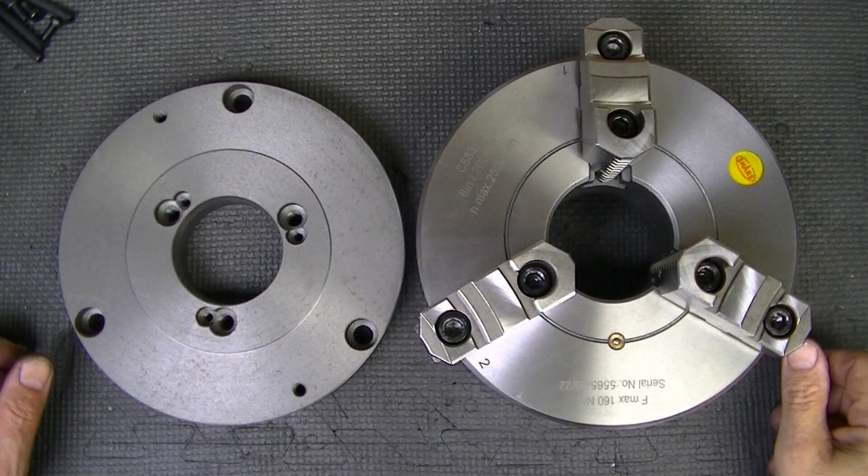Today we are going to take an 8-inch or 200 millimeter standard 3-jaw non-adjustable chuck and a standard D1-4 blank mounting plate for mounting the chuck, and we are going to make it adjustable like a Buck chuck or a Set-Tru chuck, but we're going to address the shortcomings of the standard design of those chucks as far as adjustability. I'm trying something a little different here, and we'll show the reasons why and all the design choices that went along with it. So let's get to it.

Keep your interest, I'm going to show you this chuck completed and operational. You'll notice the marker is for which adjuster we're working with: 1, 2, 3, 4, and you'll notice they're all sitting on 0, which is with the chuck running true. So this TIR here is within a half thousandth.

Now I'm going to move over to this turned diameter here where it is running out. This is my TIR at my number 2 and number 4 locations, which are 180 degrees apart. That's a full 6 thousandths TIR, which means we need to move the chuck 3 thousandths of an inch. So I go to my low side and back off 3 thousandths. I come to my high side, number 4, and tighten it to 3 thousandths.

Now I come over to the indicator and do my 2 and 4 locations. You'll notice they're darn close to 0. Now we're going to look at the opposite direction, which looks like 1.5 there, roughly 1.5, maybe 1.25. Adjust this so that we're balanced out.

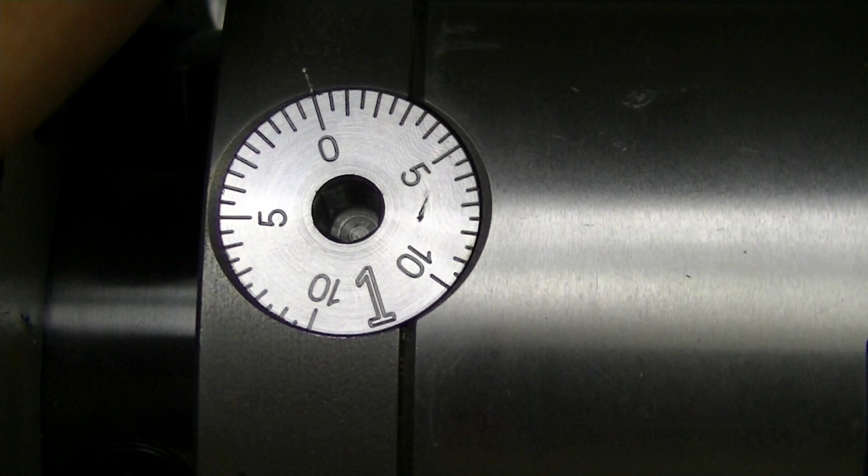Okay, now we'll go over and make that adjustment, which will be 1.25. I go to my low side, which is 1, back it up 1.25, come to 3, tighten it 1.25, and I come over and check the TIR. Pretty darn good - obviously you can tweak from there.

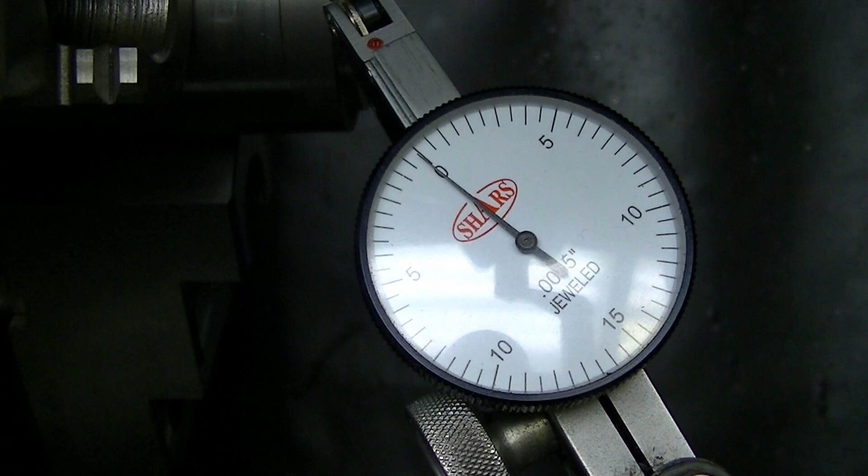The whole purpose here is that we keep a uniform amount of compression of the chuck body from the adjusters by exactly moving these opposite directions.

So why would you want an 8-inch chuck on a Tormach 15L Slant Pro? It's because this stock is only 2.5 inches in diameter. With my low speed attachment, this thing can really remove material at that size, no problem. But this piece is this long, and without being able to swallow that back into the chuck body - the equivalent of having a large through-bore chuck - you can't do anything with this. There's no tailstock, so now this is a reasonable length of extension out of the chuck. The chuck's able to grab this with much longer jaw engagement, so now this is very feasible. I'm not really using it for anything horsepower-wise; nothing's changed except this large chuck allows me to hold this piece of stock and machine it effectively.

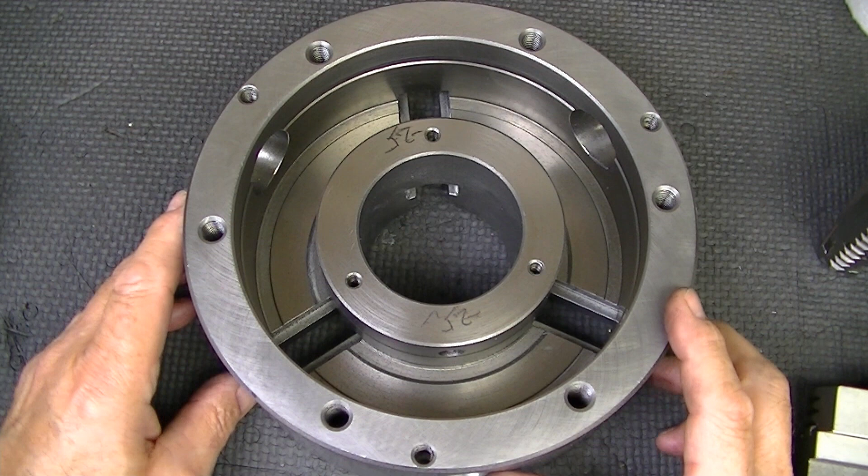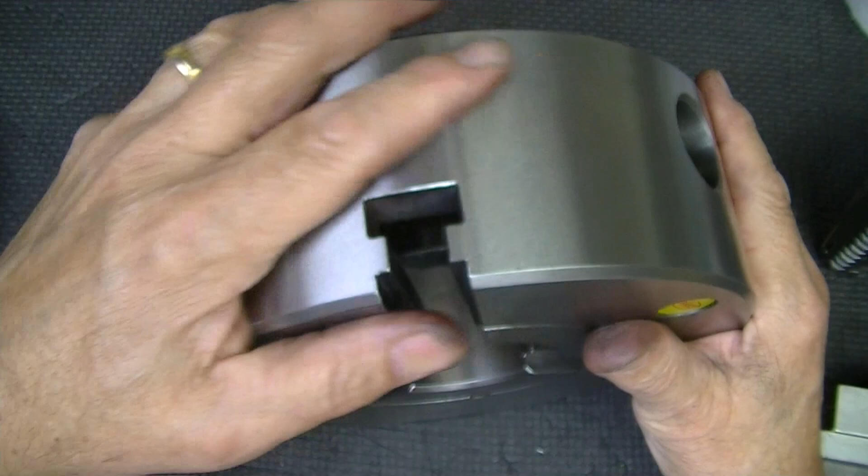For the price of these chucks, you can't really expect them to be deburred well. It takes a lot of time and effort to deburr these properly - all these internal surfaces, every edge, every area, all the outside surfaces - these should be done so that you can rub your hand on them forcibly. You have to think about this thing spinning and you happen to bump it with your hands, or you slow the chuck down with your hands - bad practice, but lots of people do it. You want this so that you can rub this hard and not have anything bite you. So that takes some time to roll the edges, chamfer all these inside edges, all these places everywhere around here, which are razor sharp when you get it. This Shars chuck - I have no affiliation with Shars.

But I found these to be a pretty high quality chuck, and I'll show you some other details of why I consider that. The scroll plate is forged, heat treated, and ground, so this is not just turned, it's actually ground. The matching jaw serrations, the teeth of the jaws, are also ground inside and outside. So in general, the actual machine work on these is pretty darn nice for the price.

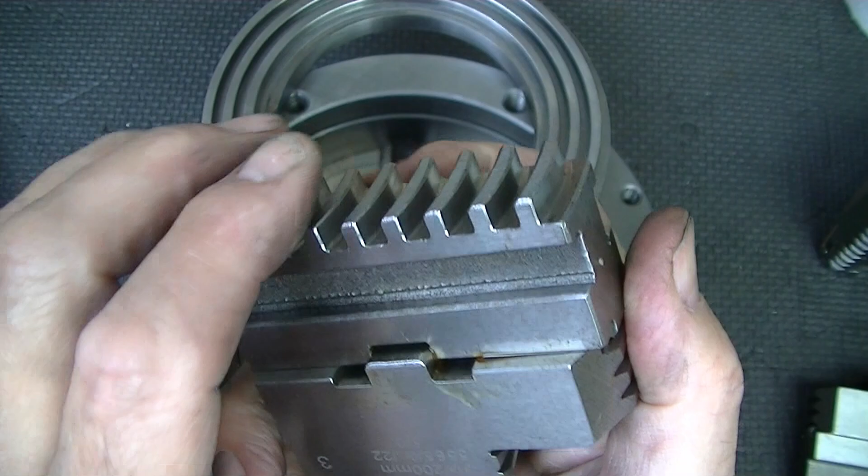I mean, ridiculously good. But like I said, it still needs an immense amount of deburring. All these edges here are razor sharp, all over from the air tool work. So you need to be able to take this thing and press it as hard as you can with your hands and not get cut. Because this thing's spinning around, and the jaws might be poking out of the chuck a little bit. Even if you don't typically touch the chuck when it's spinning, there's still a chance of slipping and bumping into this, and having it deburred that smooth can save you a hospital trip. Just a word to the wise.

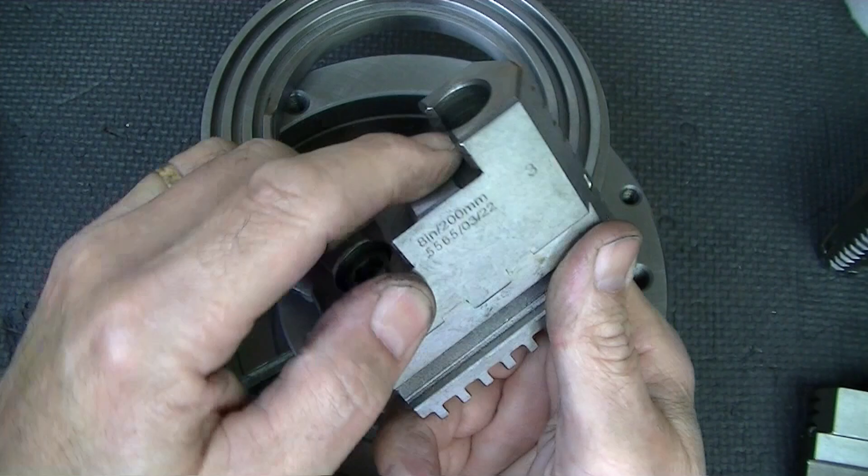Another thing is, after you've done your deburring, I use a carbide burr, a 70,000 RPM air tool with a carbide burr, like a flame point, 1/8 inch diameter, and roll over all these edges. That does a real nice job, and not using abrasives is good because you're not throwing grit into the mechanism. I'm intentionally not disassembling these jaws, I'm leaving them as factory ground because they're actually ground in place for better TIR than typical.

Then an abrasive bristle brush - I have a 6 inch by 1 inch wide one, maybe 320 grit, and hitting all these edges with that rolls those edges over even a little bit more after you've done it well with the air tool, giving you the ability to just press on it safely. If I did that the way it was when I got it, literally my hand would be in shreds.

This chuck - I'll say that a lot of cheaper Chinese stuff looks like they used grease that they scraped off the floor. The grease is clean in this one. My only comment is there were places where there was still some ductile iron dust mixed in with the grease, so it wasn't abrasive and really wouldn't cause any issue. But other than that, this was quality work.

And like I said, no connection, just sharing that I've bought several of these. The reason I'm coming back to Shars for this one is because I like the quality of the chucks for the price. Even if you don't do all the deburring I showed, one section you should pay attention to on the jaws is this edge right here.

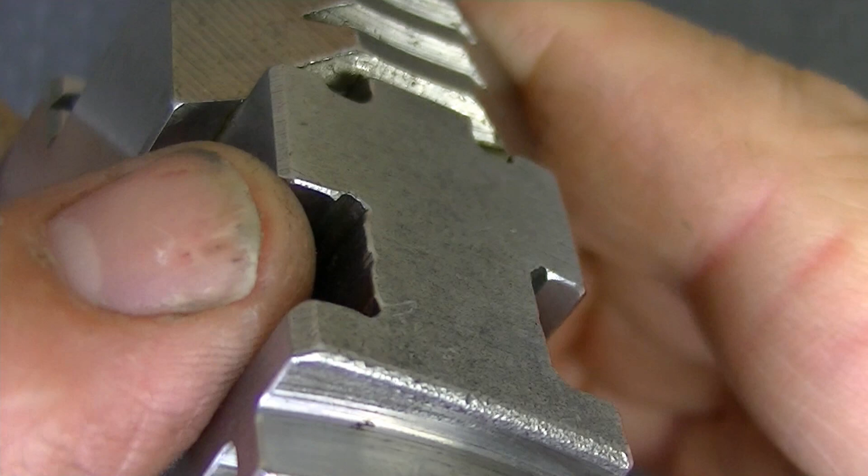These are hardened, and these were dead sharp before I rounded them on all these edges. The reason that's important, top, bottom, both ends, is when this jaw is unloaded it cocks in the slots, as I've shown in my previous video, and those edges can actually chew the iron. It has to be pretty extreme, but it can chew. So you don't want an edge capable of chewing the iron, especially given how hard these jaws are. Make sure, at least if you're deburring, that you get those edges broken so they don't chew into your jaw rails.

Another place to focus on is the scroll - getting rid of any razor edges on the edge of the scroll, where it's going to start into the jaws or might be halfway in a jaw, depending on where it is. So it would be good to make sure these edges are chamfered and don't have a razor edge, which they had beforehand. There's the chamfer on that one. Then I deburred all the other outer edges everywhere, especially in the bearing area of the scroll plate on the chuck body.

This clearance in this area, or lack of clearance there, is what controls how repeatable your chuck is. How much the scroll plate can flop around on that pilot in the chuck body is going to determine how repeatable it moves. It's also why you always want to use a single pinion location if your chuck has more than one pinion, because the force vector of that pinion forces the clearance out of the scroll plate in a particular direction. As long as you tighten it in the exact same pinion each time, it's going to deflect and seat in that same orientation, which makes sure you get the best repeatability possible.

Some people say, oh no, I was always taught to use all three pinion locations. Well, using all three pinion locations, like on a drill chuck, will definitely get your chuck tighter, but it's going to give you inconsistencies in where this thing ends up, depending on which pinion you used. So if you're after precision, don't worry about using all three.

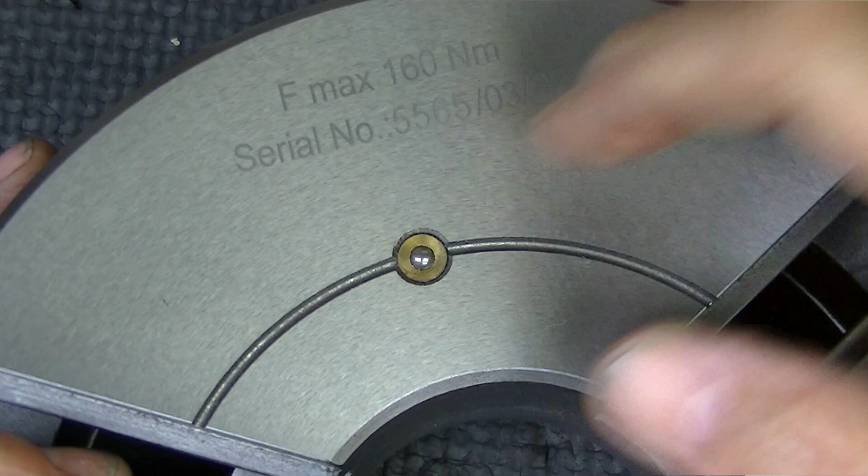Another topic for chuck pimping is this oiler fitting here. It's basically totally worthless. I have no idea why they put it in there. It comes through to where the chuck scroll face hits, and basically just fills up the scroll plate with grease, which ends up flinging out and flying all over you. So really, you don't want heavy grease on the scroll because it's going to collect chips.

The place that needs to be lubricated is the actual bearing area on the chuck where the scroll plate rides, down here. I'm having a hard time getting good lighting on that, but right down here. So I'm going to plug that, and as far as pimping the chuck, one of the changes we're going to make is to put a grease fitting in here and a grease groove that takes grease out to this bearing area where the scroll plate rides the chuck body, which is the really important place to be lubricated.

So we can see from the design of this chuck that this plate, which goes in here, its only purpose is to hold the scroll down. In theory it's close to bearing on this flat zone right here, and keeps the scroll plate from lifting up too high and not engaging with the teeth of the jaws.

This is pretty typical. Now, that's the only function this has. It has no structural function in improving the stiffness of this chuck. It's not a press fit out here. It's not doing anything to help the stiffness of the center of the chuck.

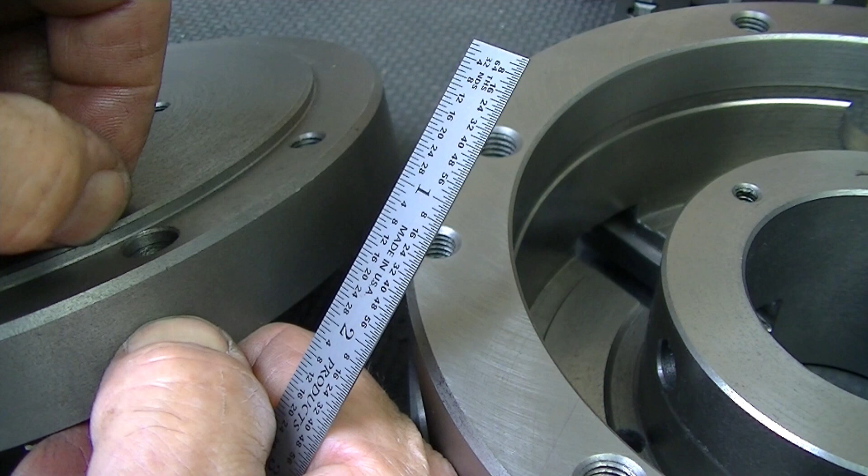Why don't I just turn a 14 millimeter long shoulder on this, where this diameter has enough clearance to give some room for the chuck to move, and do the normal set screw through the wall — 4 equally spaced opposed set screws that push on the boss on this body — and be done with it. I mean, that looks easy.

And then we could have bearing here and bearing here simultaneously. It wouldn't be connected, but it would at least be touching, and it would be quick and dirty. The issue is you have 4 set screws. Each pair is opposing each other and working against each other against the inner hub of the mounting plate, pushing.

Which basically forces these walls to expand out in this direction. You have the thread screw forcing this way, and the reaction force is out this direction, so this is being pulled and stretched in this direction. This only has limited strength. The fact that it's connected to a roughly circular face plate, being homogeneous material, makes it a little bit better, but I'm going to show you on this next chuck the amount of deformation that occurs, and this chuck is larger in diameter and thinner wall, so it would be even worse than what I'm going to show you.

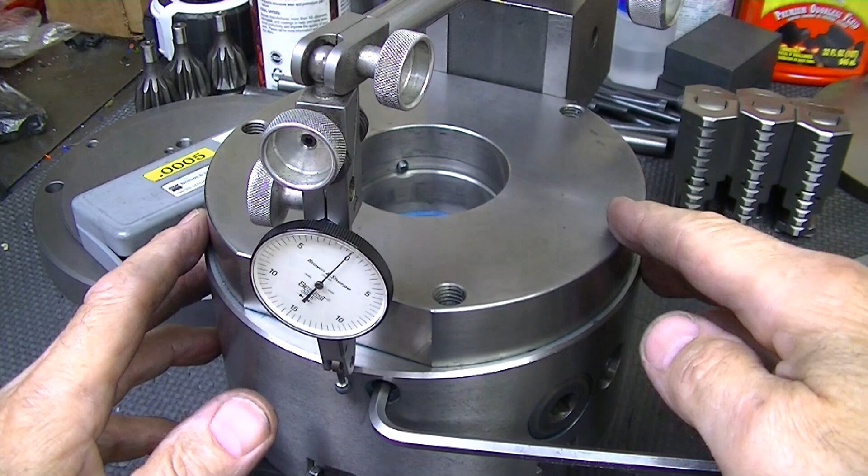So here I have the chuck. Here are the TIR adjusting screws in the chuck, here and here, and I have these just loose — they're just touching, not tight. The back one is touching. I'm sitting on the back of the chuck and the backing plate, and I'm going to come down here with the indicator and show you what happens with the actual reading as I tighten the screw here.

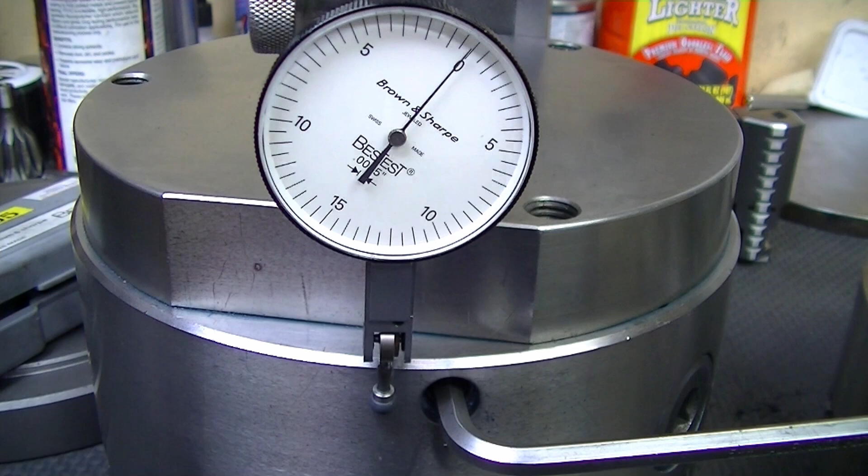So I'm going to tighten this, and you see that's 0.002 of an inch of deformation. I'm actually stretching that ring out of round that far with that force. Now, technically you're not supposed to use that much force on there, but you do have to use reasonably high forces to overcome the friction between the mounting face and the mounting plate and the chuck.

Because it has to skid, that's the weakness there. And I'm going to go over to the side, the 90-degree point, and I'm going to show you where these sides are actually caving in. I have this one loose, so it can actually, the set screw is not supporting it, and it's caving in.

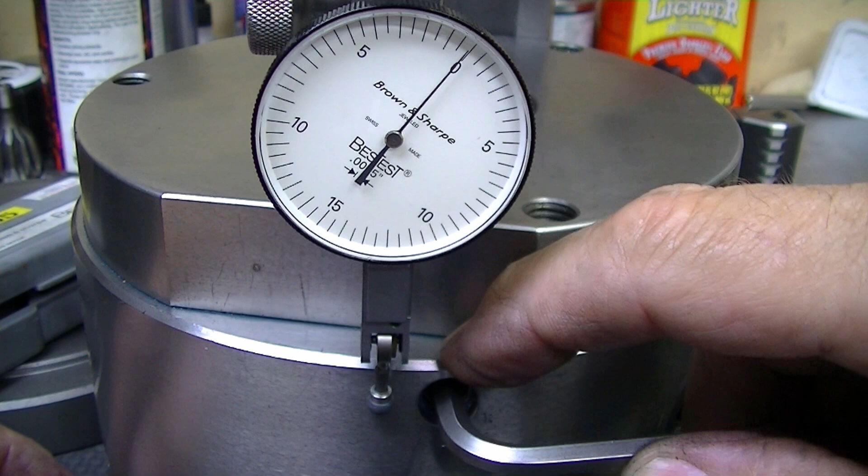That reaction of pressing on the hoop in one spot and it contracting in the other is sometimes when you tighten two opposing screws, and then you come to check the other ones, they're tighter than they were. Well, they're tighter because the hoop has been pulled by the other screws, and it has shrunk this up further than it was when you first adjusted it. So it's one of those things where, yeah, there's a reason why it seemed like I didn't think I tightened it that tight. You didn't. The hoop actually deformed in its shape because you tightened the opposite direction screws a little bit tighter, putting more stress in the hoop, pressing tighter on the other set screws.

So here I'm set up. This is the same screw I was using. This is a screw that's loose. It's not supporting the wall of the chuck. The chuck wall has room to move in without bumping into the set screw.

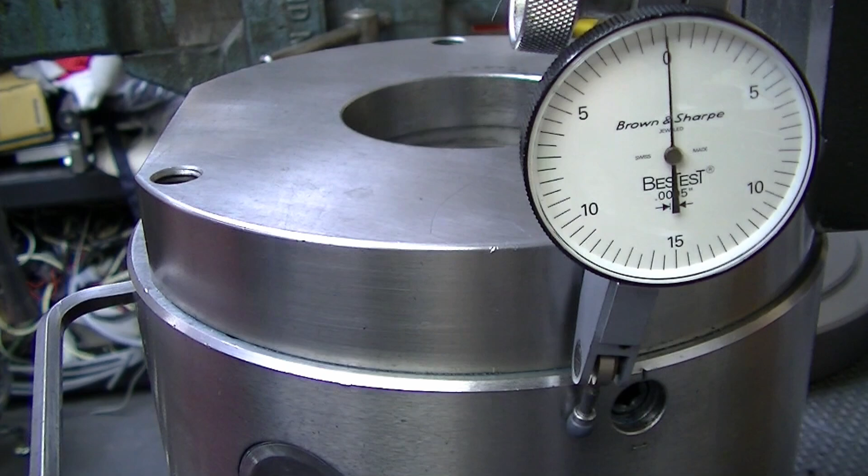I'm going to come up here with the indicator, and I'm going to tighten on the, so I can see me wrenching over here, and I'm going to tighten. You see that sucking in? That's the actual hoop deforming. The pull on this side is stretching that hoop and making it suck in on the sides. So that's the deformation that occurs.

So that's why I'm trying a different arrangement. My thoughts are, what can I do to stiffen this? Well, I can't do anything to stiffen it in tension. If I put the set screws in the wall still, there's nothing I can do to make this stiffer because the pressures here are going to pull away from whatever I have, unless you put a big external ring on here, which would be impractical. So I'm going to change the direction of forces.

I'm not going to put the screws in the chuck. I'm going to put the screws in the edge of the mounting plate. And I'm going to use a relatively large screw at 40 threads per inch so that I have finer adjustability. I'll show a SolidWorks cross section of this so that it makes more sense.

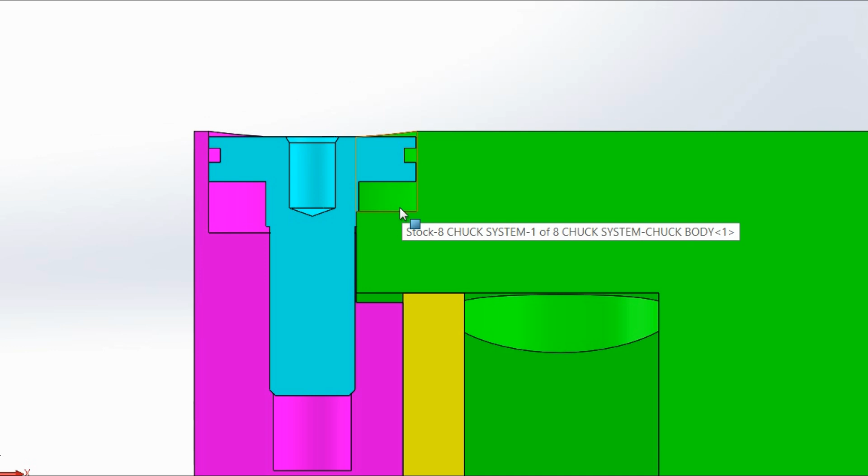Here's a cross section through the adjuster screw. The adjuster screw has 7/16-40 threads, which is 25 thousandths of an inch lead per turn. We have a 6mm hex, O-ring groove to seal it. The gap here is 4 millimeters, which is the assembled length of the needle thrust assembly, 2 washers, and the needle cage. And this side has enough room to clear so that it can move off center. That's pretty much how it works.

As this turns down in, the threads in the chuck body or chuck backing plate allow this to pull down and press on the chuck body, and on the other side you release the adjuster screw the same amount, and you can move off center a relatively accurate prescribed amount.

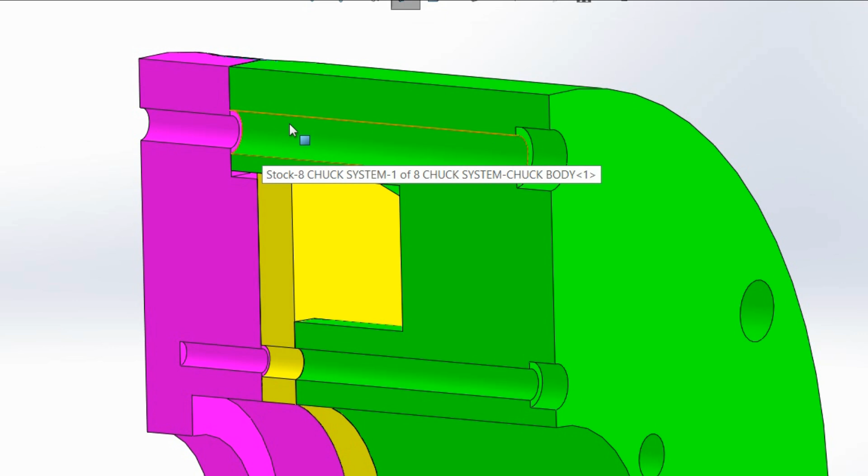Here's a section through the mounting bolt holes that hold the chuck to the backing plate. Originally this chuck was tapped from the back only, and that was the only mounting it had, was 6 holes on the outside back where the bolts came in from the back through the backing plate into the chuck. I needed to change that orientation so that we had this long neck length of screw where the lateral motions, the column of that screw, can just move side to side and not resist the motion of the chuck sliding on the backing plate.

So I just drilled through the chuck from the back, counterbored from this side, and then added the 6-hole bolt circle of M6 screws on this side that go through the stiffener plate that we made and into the chuck backing plate.

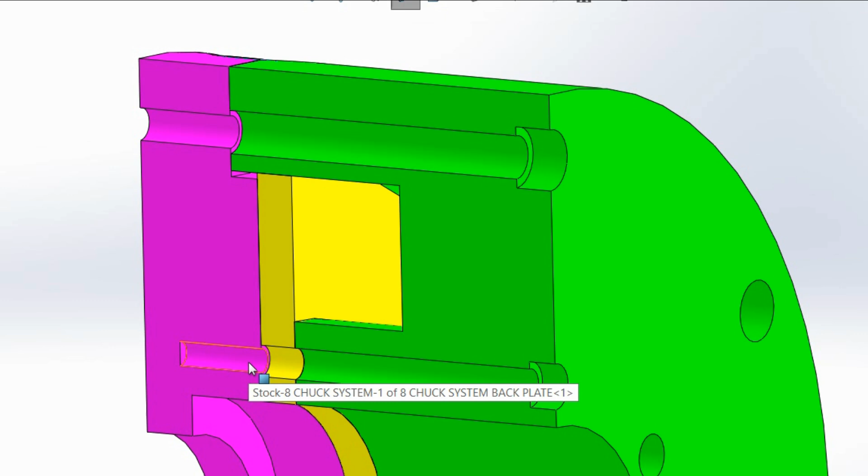This is held on at the ID of the chuck and at the OD of the chuck, and all these screws get relieved so that there's plenty of clearance for this to be able to move sideways.

One technique I use for home tooling is to turn the heads of the socket head screws concentric to the shank at a smaller diameter. In this case I use a 1/2 inch diameter for the M8 screws and 3/8 diameter for the M6 screws, then cut the same diameter with the counterbores, so there's only a few thousandths clearance. It makes it very nice for things where coolant or chips get on them. There's no room for any chips to get in around the outside of the head of the screw—they can only get in the socket, and that's it. So it makes it easier to clean and just looks more professional.

Bottom line is, I'm going to take this piece of steel here, face it off to 5/16 thick, 8 millimeters, and make it a light press fit in this diameter here. And it's going to sit down on here.

I will put the pieces that are required to have the scroll held in place, attach them to the bottom of this so that it all fits, and it'll get the bore to match this bore. But now this cross section, this thick ring, is forcibly holding this tight, so that the external forces from the adjusters are being supported by this much larger plate, and the cross section of this is much thicker.

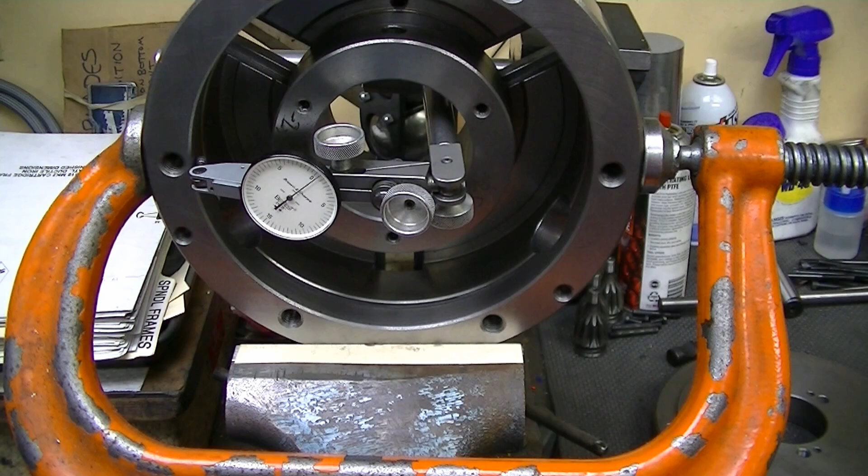Here I have the chuck body in a vise gently held, and I have my indicator wrapped around the back here, sitting on the front face, reaching through to have a good seat on the face of the chuck.

Basically what we're doing here is measuring how easy it is to compress this. So you see I've got the C-clamp on there. It's actually zeroed released. I have the C-clamp snugged just enough to hold it on there, which is deflecting at 5/10 already.

Now I'm going to just give it a good crank here. And that is just moderately tight—you can see there I've almost deflected this 3.5. I could easily take this to 4 thousandths without any problem. Keep that in mind, because I'm going to show you what that deflection is after we get done putting in our pressed-in plate.

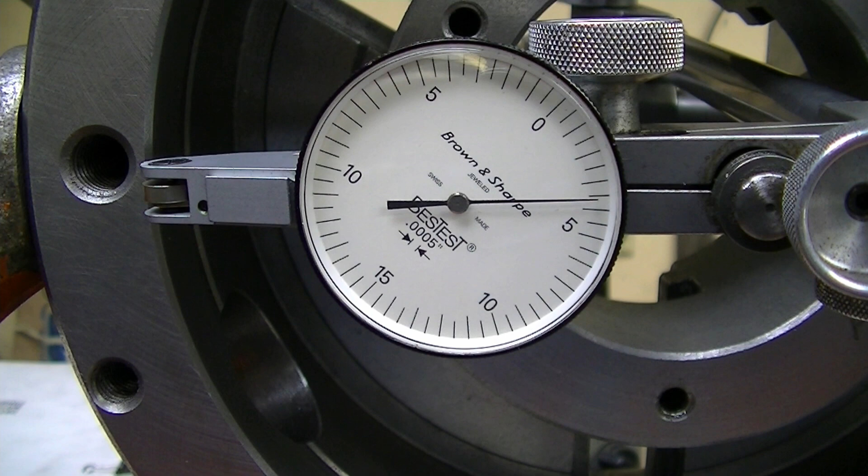This chuck was designed to have the bolts come in from the back, but that's no good for a Set-Tru or Buck chuck adjustment, because this surface needs to skid. Obviously if we put this screw in and have this surface bear on the back, not much skidding is going to go on—it doesn't have any room to move, and this fastener face would have to skid on the back surface.

So as per most chucks designed that way, you use a long bolt that has plenty of room to just flex laterally for the few thousandths of an inch of adjustment you're making, and this bolt can go in the tapped hole and then just flex at the head. This stays stationary, and they're just flexing this long section of the bolt.

Now, since I'm bolting the inner section of this also to the chuck mounting plate, I have the same situation. I'm going to use a long M6 screw on this bolt pattern here, so that it also can flex.

Just a chance to show the collet-held stop from my chuck stop video. This is super handy—it lets me go in and just set that quick to be grabbing by just the one lip of the jaw. Another beauty of this is it's a one-time piece, so I'm not actually putting the stop in there for a repeat position. I'm putting it in there simply to square the part.

But I need to drill and bore a hole in this, so this is in the way. I can just pop the collet loose and shift this back out of the way, lock it up again, and I'm ready to go.

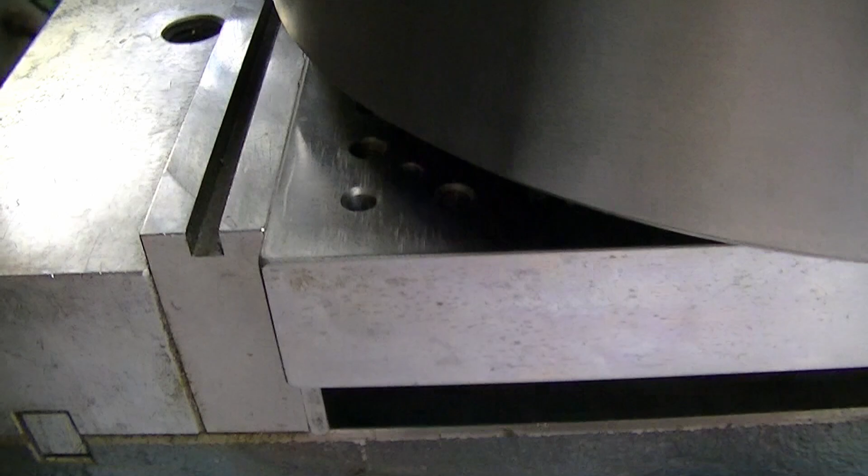I have my little 6 by 6 mini pallet in the vise, so I can hold this chuck face down, and I have it trammed in by bridging across the 2 socket head screws on the threaded section, just manually manipulating that until it lines up, then snugging the bolts down. I have other strap clamps which are the same size and parallel as spacers, so that when I drill through, I'm not drilling into my pallet.

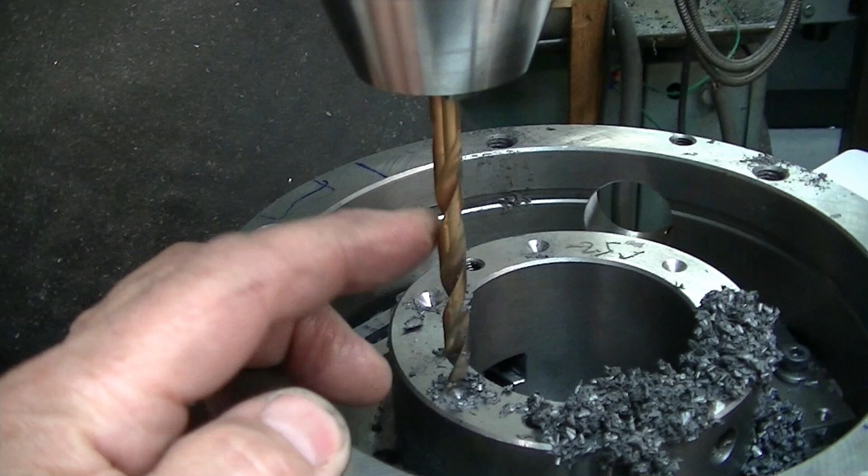Just a little side note here: when you're drilling a long hole and you want it to stay as straight as possible, ideally you should use a screw machine drill, something very stiff and short, to drill the initial hole, and then switch to a longer drill.

These longer drills, the slenderness ratio, the diameter to length extended, is in the realm where Euler buckling can occur. What that is: under high compressive loads, the lateral stability of the column, if you want to call it that, gets very rubbery, and buildings have collapsed way back before they were aware of this.

So be very gentle. If you're going to use a long drill, be gentle on your feed rate. Don't horse the drill until you get some engagement where that first section of drill, first section of hole, is established nice and straight. Then after that, because the hole is now guiding and stabilizing the drill down in the hole, you can feed a little bit heavier.

But just a note that if you wonder why holes wander, it could be because you're horsing on the drill, and what happens is that Euler buckling, when it occurs in the beginning, actually bends and the drill starts to go off in a direction. Once that starts, it follows in that direction and can get carried away.

I've drilled through this bolt circle, the original bolt circle that was used for mounting the chuck, with a drill larger than 8 millimeters to give room for the chuck body to move when it's adjusted. But down here at the very end, it's close to on size with the head of the screw, so this whole section has been relieved so there's plenty of room for this to move uninfluenced.

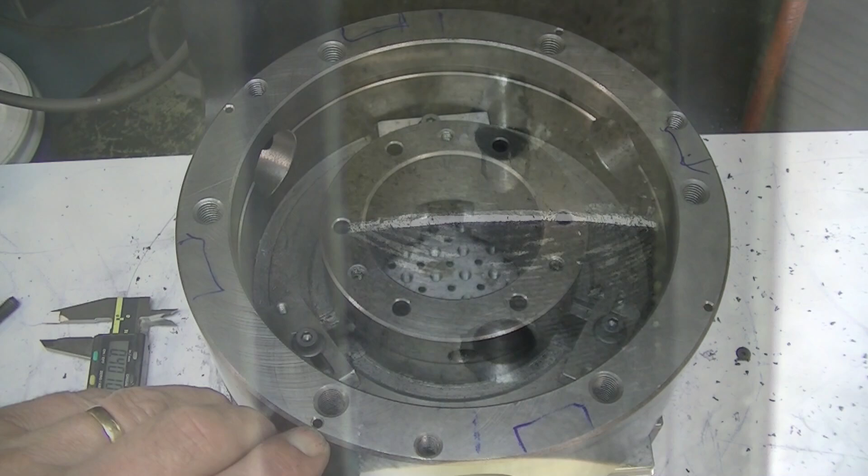Here are the modifications to grease the actual bearing surface of the scroll on the chuck. This is the chuck bearing surface here. I drilled a hole through on an angle. This is tapped M3, and then a full diameter that's a bit bigger than M3, so it doesn't have any interruptions in the surface, and a chamfer.

And that is what mates up with this style of grease gun, a plunger style grease gun. So this goes in, you back the jaws out and press this in, and the action of pressing it in actually seals it. It'll push grease out through this, and then you rotate the scroll plate with the chuck key without the jaws in and just spin that around to clean that whole area out and grease it well.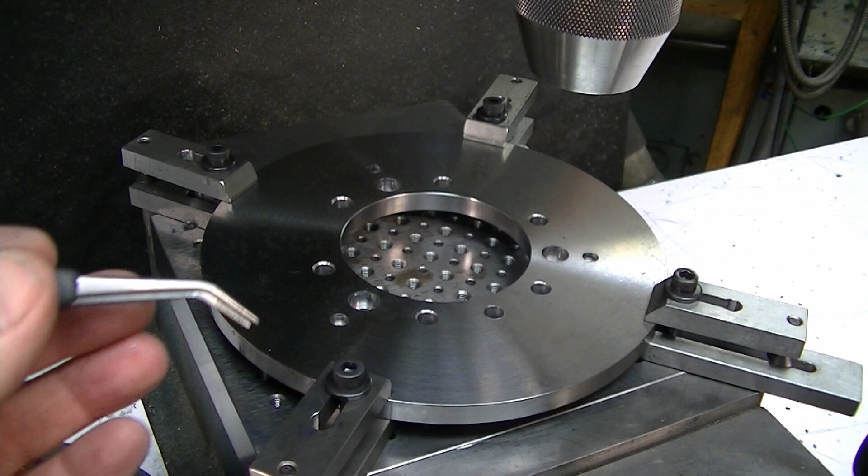Here's the plate that is going to stiffen the back of the chuck body, and I'm putting a bolt pattern in now. The holes here are for 3 screws that hold this to the chuck. These 6 holes, this 6-hole pattern, are through holes for the 6 M6 screws that are going to hold the center of the chuck back tight to the mounting plate.

These holes are for holding the scroll retaining ring in place. This is going to get machined out here. This is going to be just a thin shell of what it was, and this will be held in with 3 M3 screws that go in these holes here.

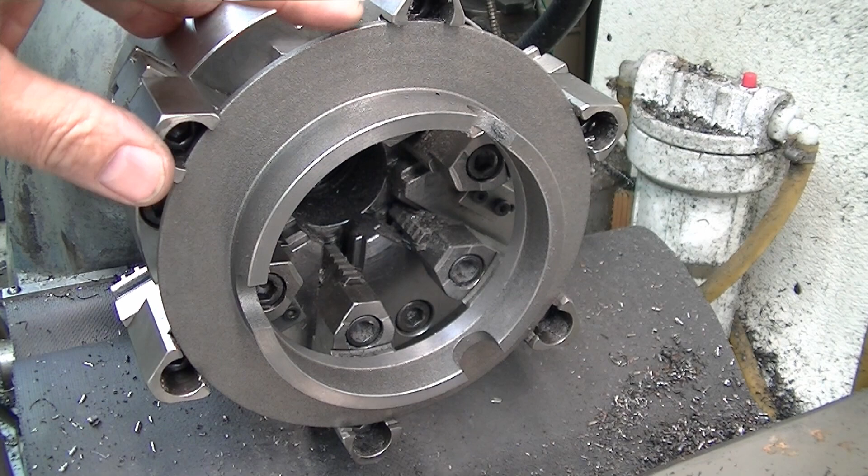It's a shame the chuck manufacturer didn't take the opportunity to do what I'm doing with this, which is make the OD of this the press fit inside the chuck body, supporting the outer chuck ring, and just made this a little thicker. So I'm just using this to get this piece out of here so I don't have to make something custom. Bored this to fit the pilot of the chuck body. I'm going to remove this flange because once this is faced down to the correct thickness to attach to my steel plate, none of this flange is going to be left anyhow.

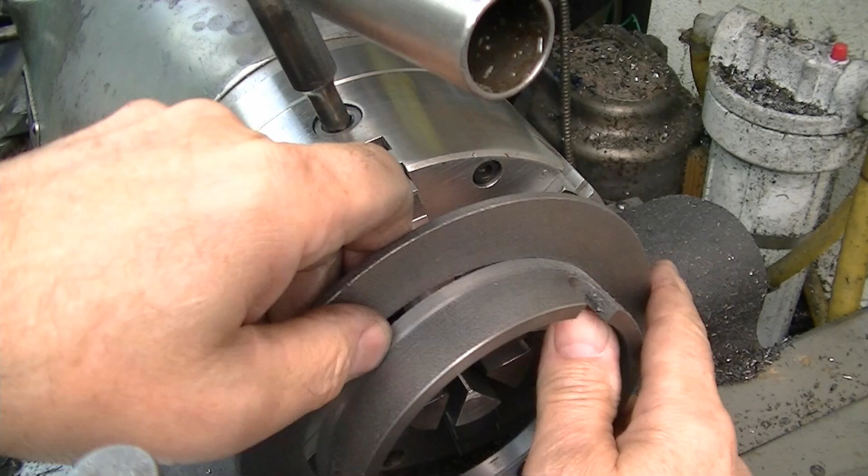Holding this internally to part it off to the correct length. This ring, under any circumstances, is relatively frail because this is all that's going to be left holding a ring. That's why I'm holding it on this side, even though that's where I'm parting. If I held it over here, the chuck pressure would just take this and basically want to snap this off right here. Where here I have a continuous loop, ignoring the flange out here, it's really doing not much other than keeping this section from wanting to bend. It's just a stronger way to grip it, and your forces are right over the jaws, so I just have to be careful to go in and part just till I'm close, and then I'll snap off the rest.

You can see here where I just stopped, where at the jaws it was able to cut through, and it puffed the inside here, so this should just pop here.

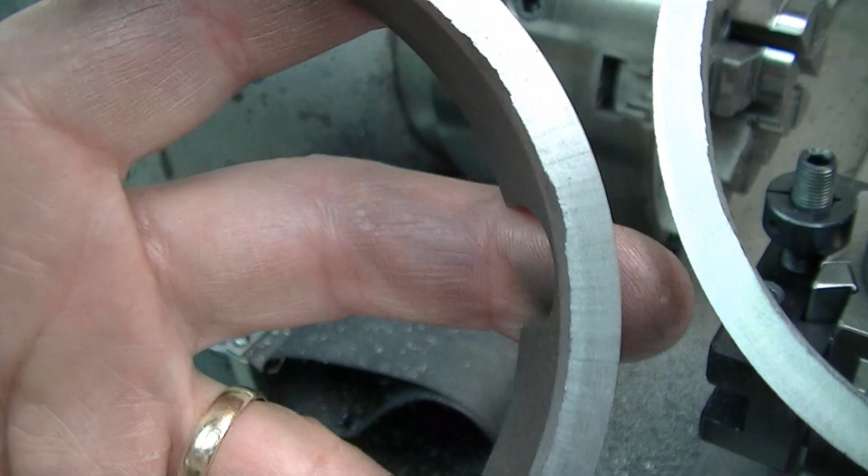Yeah, I think this is just plain cast iron. The way that cracked right there is a cast, the way cast behaves, not the way that ductile behaves.

Here we're using the pallet to drill the 3 tapped holes in the scroll plate capture ring that match up with the back plate. Here I was able to use the dowels in my plate and a parallel to get this thing rotationally oriented before I indicated it in, so handy.

Still using the pallet, I have the D1-4 backing plate on here to do the bolt circles for the screws that hold the chuck to the backing plate, and I'm using a bar, 2 dowel pins, to get my alignment to the existing bolt holes.

You'll see here that there were some standard holes in the backing plate, and there's one at 180 from that over on the back side that I had to fill up because one of my screws runs into this. So whenever you're doing something like this, you really got to be careful and pay attention to what runs into what, especially when you're adding new features.

It pays to have a 3D model, because you can really get bit in the butt where everything looks good and all of a sudden you go to put some feature in, and it's like, ah, there's another hole there. So yeah, foresight beats hindsight by a damn sight.

So yeah, think ahead. Now we have our bolt circle out here for the outer bolt circle of the chuck, the inner bolt circle that we've added to the chuck, and we have our all-important 4 equal spaced dowel pin holes that are going to allow us to stage this part in the vise for the angular pockets.

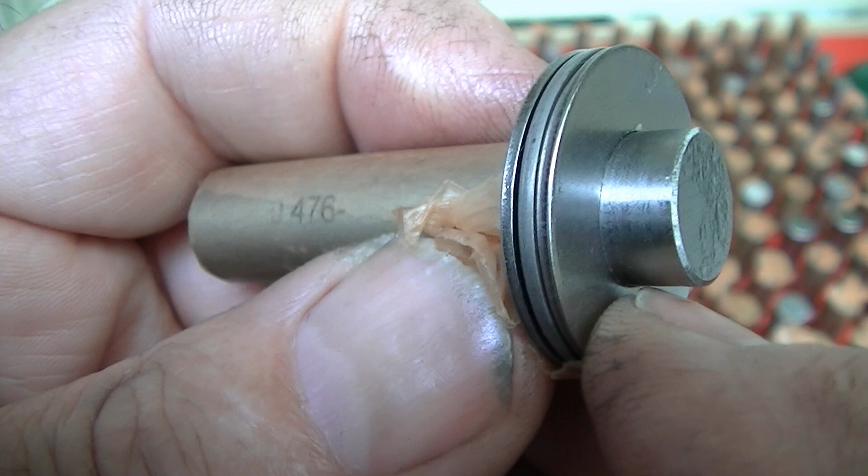This bearing is what presses on the chuck to skid it sideways to make it adjust laterally, but in the process of that, the ones that are at 90 degrees to it see skidding forces this way, and I don't want this race to have a lot of room to flop around sideways because of those forces.

So I'm using a functional gauge pin to get the size that will actually work on this. It's always a good idea to actually see the number on the pin, not just trust the slot it came out of. And in this case, the actual bearing has a little bit smaller diameter than the race, but that's okay.

I just want to make sure that these will fit, as close as possible. Not a good idea for production situations, because there's probably a wide range that these can vary in, but for a one-off in your own shop, for a particular function, there's nothing wrong with doing that.

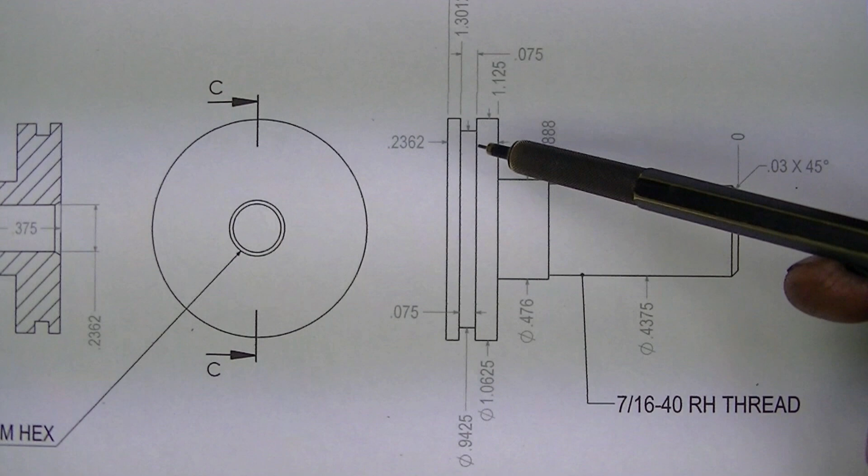Here's our adjuster screw. I'd really like to have a piece of material that was actually forged, so you had grain flow around the corners like this, and it was heat treated to maybe 170,000 tensile strength and properly tempered. That would be really nice, and I only want to spend about $3.72 for each piece. That's how you do that - that's exactly what I just described: forged, professionally heat treated and tempered to 170,000 tensile strength, and this is big enough to get the piece I need out of there without a bunch of excess material removal.

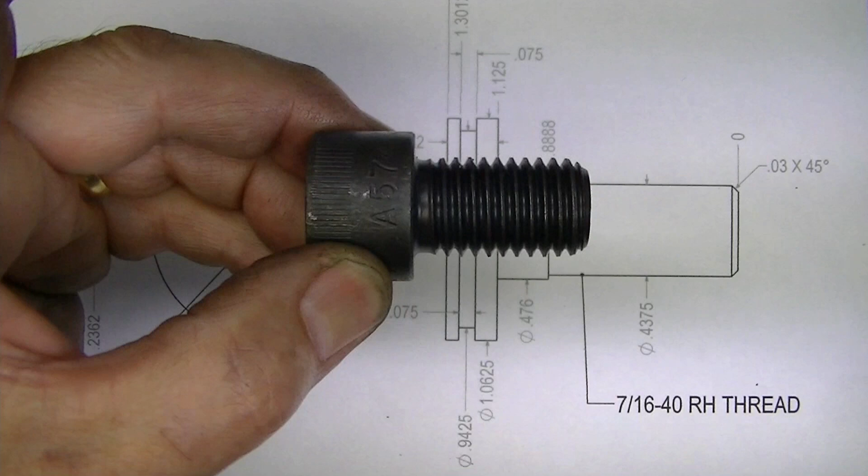Just a tip for when you need a high strength material and you want it inexpensively.

We're using a 7/16-40 tap, and I made a 7/16-40 gauge using this tap, but I made it out of ductile iron similar to what the chuck backing plate is. That's where the threads are going to be, so I can now use this to size the threads on the adjuster screws.

It's important to have a plan of attack when you use something like this. In this case, I've got 7/16-40 threads down here, which are very delicate and fine, so I don't want to clamp on that. I have a 12mm section here which I can, but I look at this and say, okay, I'm going to grab it on the 3/4 diameter here first, finish turn this 1-1/16 diameter here, and use that as my basis for holding this for all these other operations.

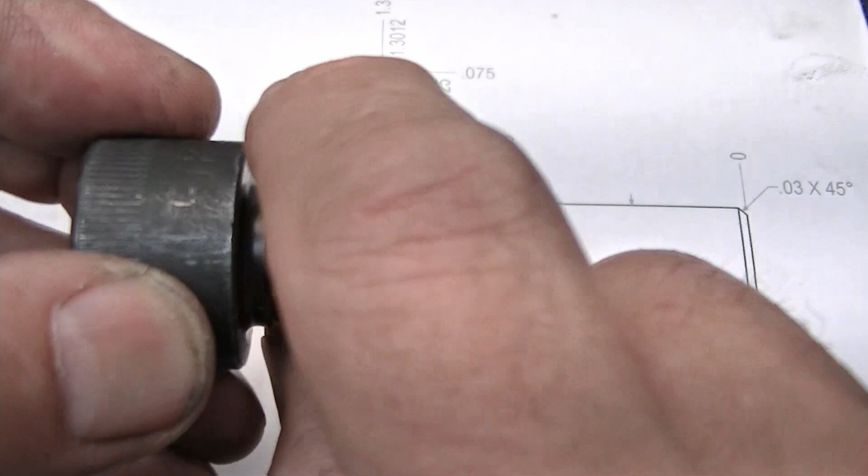I put the part in and out with a stop so I can drop each one in for each operation. Once I'm done with that, I can grab on the 12 millimeter in the collet, whack off the excess, put in the O-ring groove, and do the drill and broach for the hex. Threading here on the Hardinge using a full profile insert which tops the thread, which is very handy.

Here's the fit on that. You can see the indicator is definitely touching, and now I'm twisting this back and forth this way, but this still moves free.

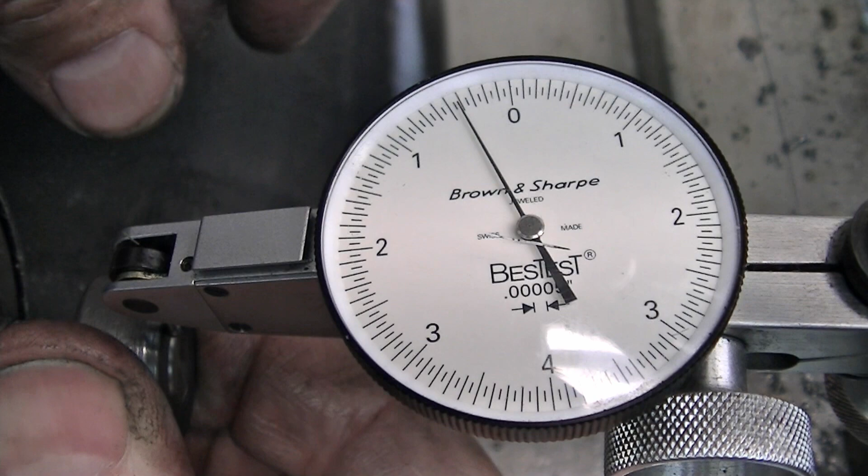I'm going in and doing the O-ring groove. I'll pop each piece in, do the groove, and then come back and set up the chamfer. But all these operations have been done by a single operation, putting the part in and out of the collet.

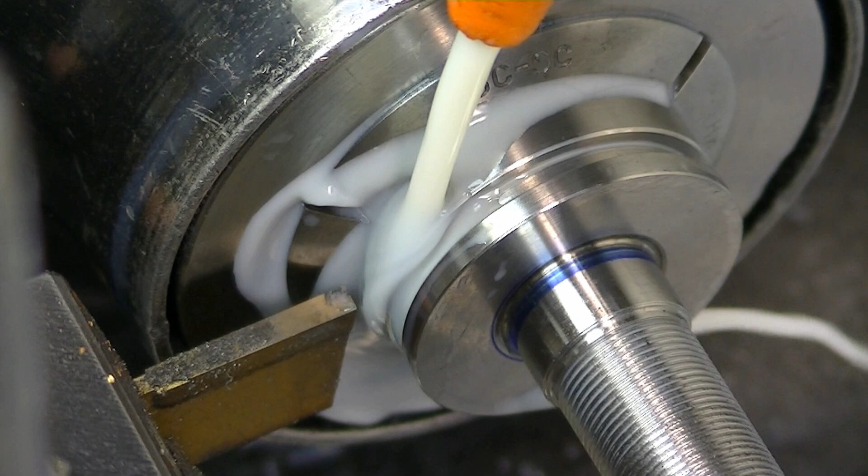Groove is chamfered. Now I'm going to part them off about 10 thousandths long. Here's where I ran into the hex, and that's why it popped off. Facing off.

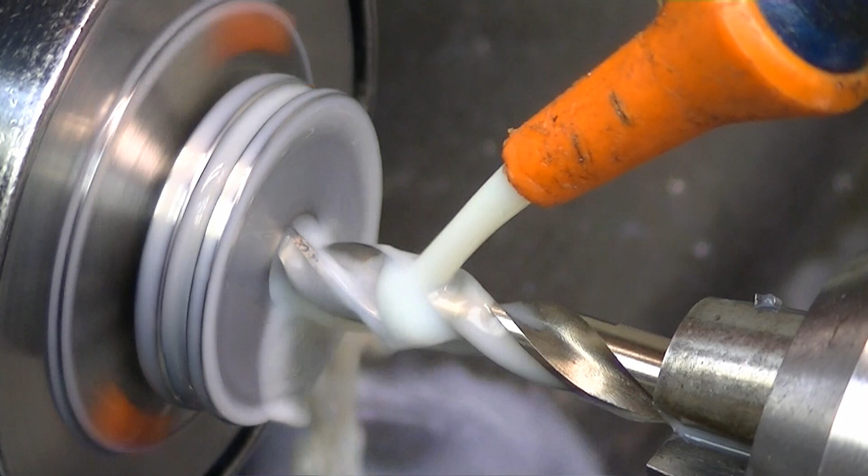Center drill all 4 pieces, in and out of the collet. Drilling a hole slightly larger than 6 millimeters, so that there's room for the coolant to get out past the broach, so it's not hydraulically locked.

This socket head cap screw machines pretty nicely, using a 6 millimeter rotary broach. It takes some serious pressure - you can see the compacted chips down at the bottom of the hole, and that's why we're going back in with the drill again to get rid of them.

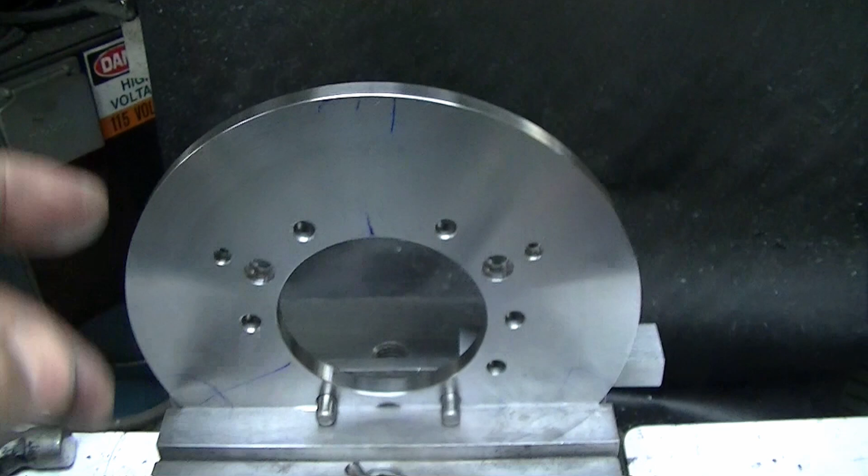There, the chips are removed from the bottom. We need to cut a relief for where the pinion intersects with this plate and interferes, and we're using the bolt holes already in here, actually the clearance holes for the screws, as fixturing. I have a stop glued on in the back here that's my locator for lateral positioning, so I can get on here sideways, get my location, which is just a visual touch, and cut an 1/8 inch deep. Then I can just move one of these dowels over to the next hole, get my next index, and carry around to do all 3 sides.

Picking up center isn't critical in this case because we've got tons of clearance - this is just about eyeball alignment here. I want as large a radius as possible to match the pinion diameter. I happen to have a tapered end mill that's actually a little bit smaller than the pinion, but I want the maximum radius size here.

So I'm setting my Z here where I'm still on a cutting flute. Then I touched the edge and moved in my 1/8 inch from there, so I will be feeding down in Z to cut.

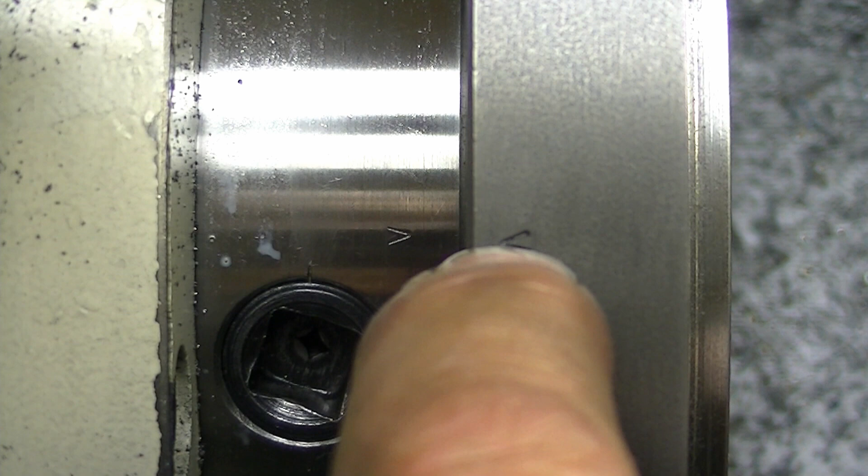I always mark my backing plates for the chucks with a V that matches with the V I've stamped on the spindle nose, so that these are always oriented in the same location. Here we're on the lathe, mounted up and turning the diameters that were required for the chuck system.

We've faced this to be true, running true to the spindle. This is relieved to clear the backing plate that we made. This is the correct step height from here to here.

In the ballpark, we'll grind the chuck on the other side to match whatever dimension we machined this to. And then this has been bored out till it was almost at the spindle nose to match the through hole of the chuck itself, giving us that much more room to stick large diameter stock back in further, without disturbing the holes that are here for the cam lock system.

So this is the cam lock main stud, the anti-rotation screw hole, and then these are the holes that I put in for mounting the center of the chuck, pulling the face of the chuck back tight against the reference surface.

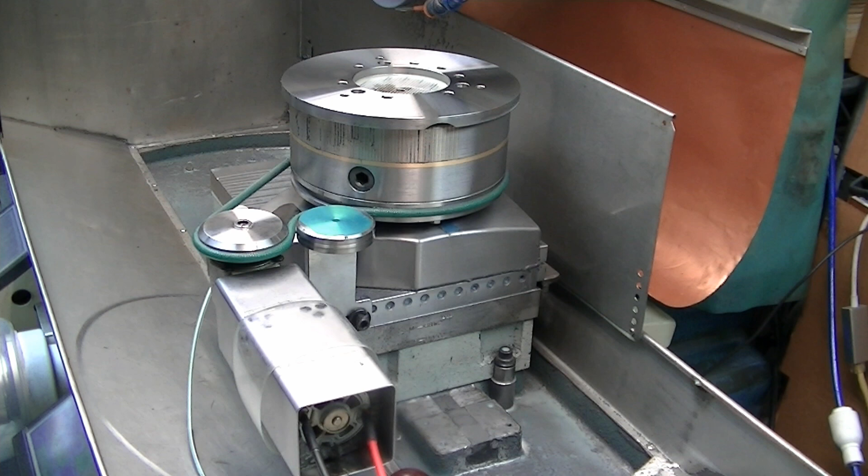New spin grinder that I built. Instagram followers will recognize this. I documented most of building this and getting it accurate.

That's about 3 micro inches TIR on the outside of that 6-inch chuck face. So it runs pretty darn good.

I have the magnet turned on just lightly, just enough to barely hold it on the faceplate there, dusting it off flat. And now I'm going to flip it over and just get the other side so this is parallel.

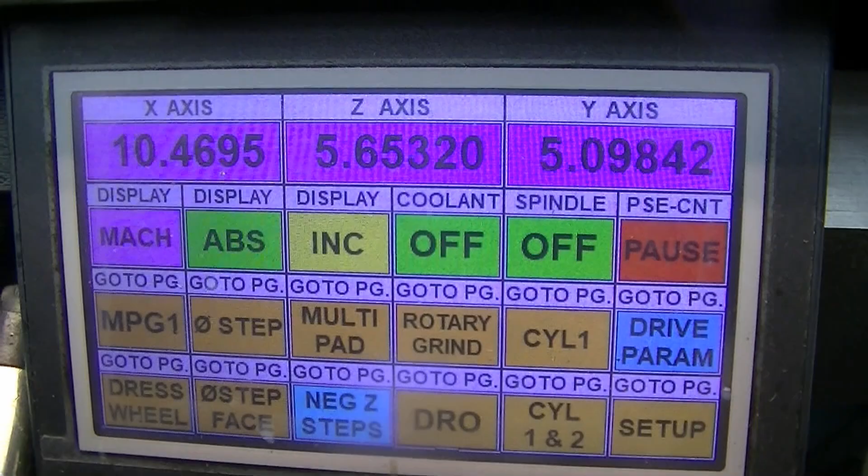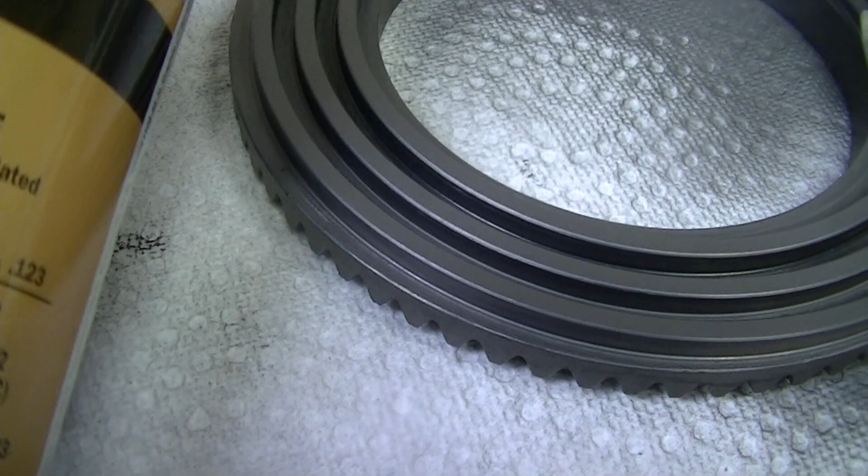Trying this gray spray-on graphite lube, and there's the layer that it leaves on there. Kind of ideal for the scroll, having no actual liquid or greasy things to attract chips in there. So we'll see how it works.

I have the scroll plate in, lubed. I have the scroll backup ring that is meant to screw into the back of this that I salvaged from the original plate.

I have G4700 Molykote lube on all the rotating parts of the pinions, and I have it on the gear teeth. We have the dry graphite spray on the scroll teeth.

These are quarter-inch carbide rods, just because that's what I have that's on size. And this is going to let this piece, which is a light press, get aligned rotationally when I put it in.

I just have to put some blue moly on the outside. I already have it on the inside here, and then we'll press this together. It's just a very light press, but it's there to support the outer shell.

Even though I lubed everything on the scroll on the pilot diameter, I actually tried out the lube system here, putting this into the hole, pressurizing this as I crank it around, and you can actually see the grease try to ooze out through the sides gently as it goes around. So it's a good way to clean out and keep it well lubricated.

Same setup as last time, but now we have the stiffener plate inside pressed in here, and same situation. I'm going to release this completely. You can see that I'm zeroed there, and now I'm going to crank up to where I was before.

You can see that is about 6/10 instead of the almost 4/1000 that we had before. I'm putting about the same amount of pressure on. So you can see that really stiffened that whole section up, because now it has to compress this whole plate section. It still has flexibility, everything's still rubber, but we've decreased the deflection by a huge percentage.

At the Micro-Hite here, taking measurements of the chuck body assembled with our plate that's pressed in, using a gauge block here to be able to measure a recess, because this probe actually isn't meant to go in recesses at all, but this allows me to get a good reading without doing that.

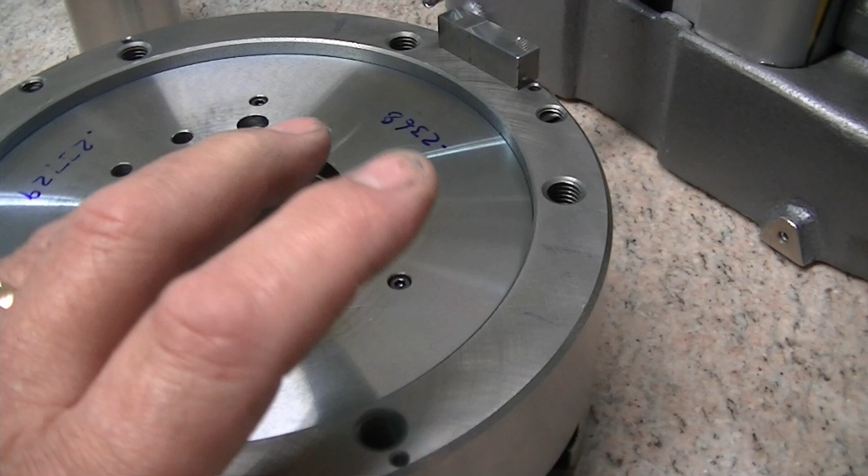This surface and this surface both bear on the backing plate now, so the step height here needs to be identical if I'm not going to distort the chuck when these two bolt patterns are snugged.

So over here we have that same height that I've measured, that was machined on the lathe, and this was the design size. So the error here between this and the other one is about 2/1000, and that means I'll just grind about 2/1000 off of this to match the reading that I have here.

While I'm grinding this on the spin table, I will grind this surface until the taper starts to seat and stick on the spindle nose. Right now it's darn close.

This seats, and you can't get any shake or play manually on the spindle nose, but this really should be ground until this has just a few tenths, half a thousandth gap when you push it on by hand. Then when you use your cams to suck back, this actually forcibly seats on the spindle nose a little bit. Can't go overboard, because then you have a situation where if this doesn't seat, you've really got a bad situation.

Then without that facial contact, the chuck will be unstable. So just dust a little bit off of this until that gets snug. I can go back and forth, trial and error until I get that feel, and we'll be good to go.

Tapped in the plate on the spindle to run reasonably true. A thousandth or two is plenty good enough for what we're doing here. It has no effect on the facial grinding that we're doing to a degree. Turn the chuck on, and then we're good to go.

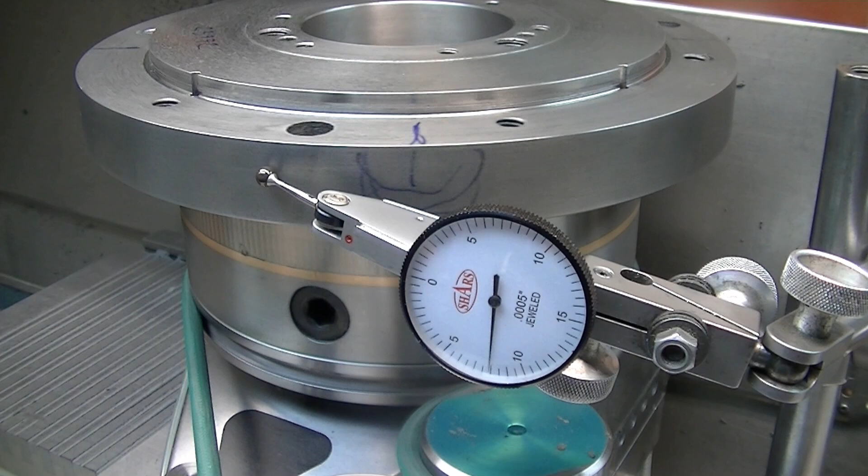Grind these other surfaces. This is totally overkill, not necessarily for grinding the height, but for the surface finish that's on these. This is ductile iron. I'll show you the reflection of the indicator there. This was without coolant.

You can see the whole setup here. And then I have a power supply down here that is variable speed. Lets me adjust that.

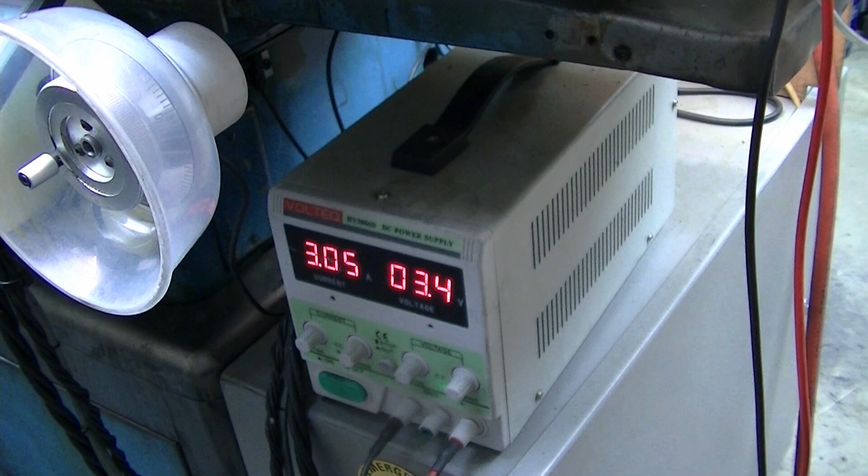That's at 10 millionths per division on the upper scale there, so it's roughly bumping around about 5-6 millionths. That would be better if I had used coolant to show you that that's the scale it's on. This is erroneous here, that button's not flush. The marker doesn't work, I'm actually on the 10 millionths per division scale.

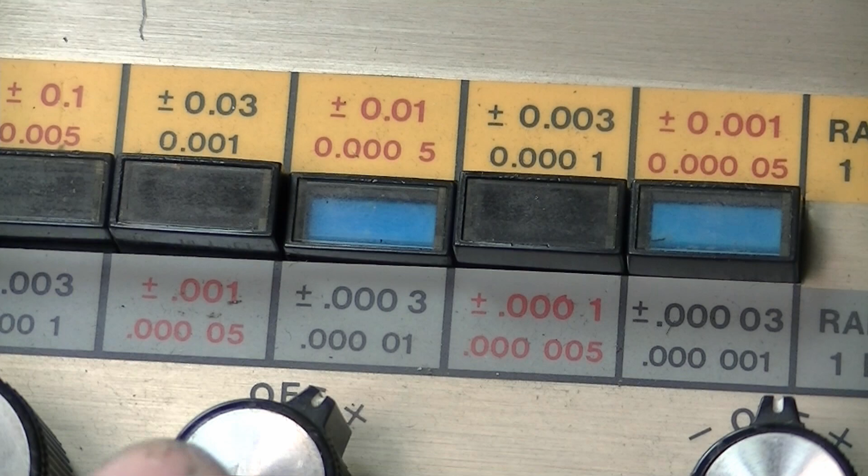Very handy for parts that hang out over the chuck to pop off the magnetic chuck from the residual magnetism.

Now we have the chuck body. I ground the other piece to have the nominal step height, and measured exactly what that was. Now I'm going to kiss the top here so we get a good finish on this, and then drop down to that exact height and grind just the band where this sits. So these two will be a perfect match with each other.

I'm zoomed in here on the grind on the outer edge where I was using the traverse across on the x-axis, not the normal z-axis. So you can see that one grind lay is like this, even though it has a little curve in it, and one grind lay is like that. And that's from the wheel approaching on two different sides in X.

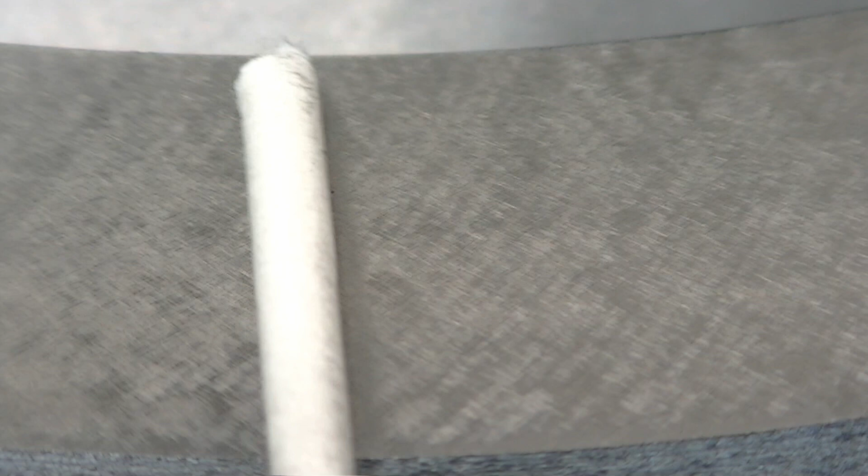Notice how even that pattern is. There's not one that's more predominant than the other. Now, that is where I'm talking about when you're grinding in this axis, that you get your two different cross sides. This side is creating one angle relative to the outside diameter. This is creating the opposite.

But if you don't have the axis of rotation of the grind fixture perfectly perpendicular this way to the table travel in the X, you're going to have a place where it's either going to hit on this side and cut air here, or vice versa, and it's going to cut a conical one way or the other, convex or concave. And most grind fixtures are not tweaked in this direction, so beware. Don't think you can just willy-nilly do this on a standard grind fixture, because it's probably not aligned laterally good enough to do what's going on here. To get that pattern that uniform requires it to be within sub-tenth level of alignment over that long distance.

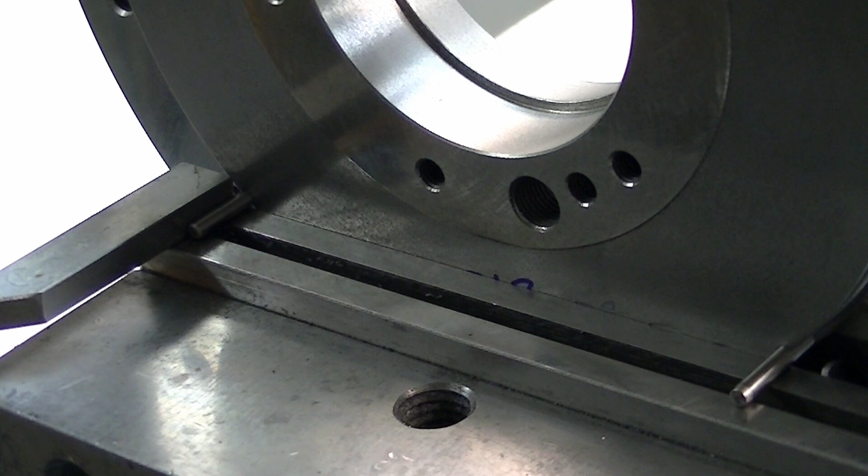Here you can see I'm using the indexing holes that we put in those pieces previously to be able to do a 90-degree index. The bar on the left there is just super glued onto the vice jaw for the x-axis direction stop, and we'll go on from there.

Using a torque wrench to get a consistent tightening force on here, since this part sticks up so high. The long box wrench is on there so I can loosen it, because this is a ratchet, so you have to keep flipping the ratchet. So I use this to loosen, and then the torque wrench to tighten.

Drilling the tap drill hole.

Here's an important machining note: you have to be conscious of the lever arm that the cutter has against the gripping area, how far away this is. This is getting pretty long, and what that means is the cutter forces here have this huge ratio of lever arm relative to the grip area. If you're not careful, if you're not gripping tight enough or have enough span where you're actually gripping, this is where crashes can occur, because this can peel out. That's also why I have the torque wrench on here. I have 70 foot-pounds of clamping torque consistently to have a high clamping force, and to be aware of that, and also not getting carried away with the feed rates.

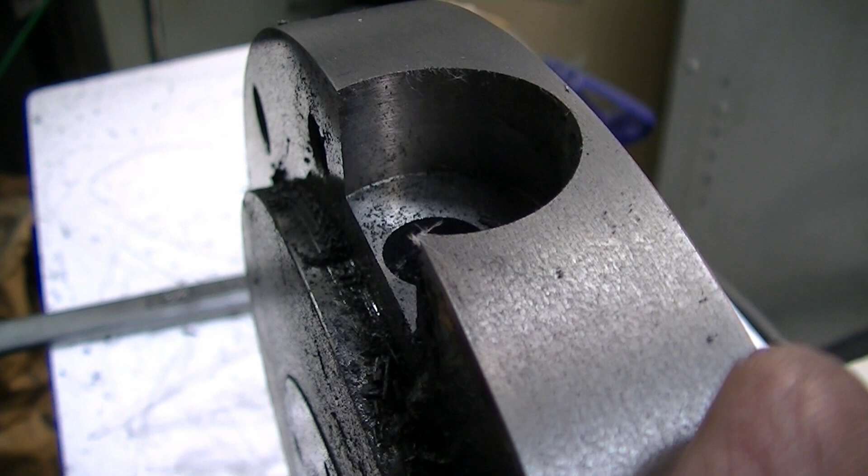Be aware of this. Here we have the recess roughed out with a 1-inch end mill, and it's going to be bored out to 1 1/16. Chamfering the tap hole with a big 3 Severance countersink. Boring out the 1 1/16. This is the rough pass. Now the finish pass.

Now physical check with the actual head of the adjuster screw. Oh yeah. Doing that big chamfer there that blends into just about zero and then back up. Now we're doing the 7/16-40 tap.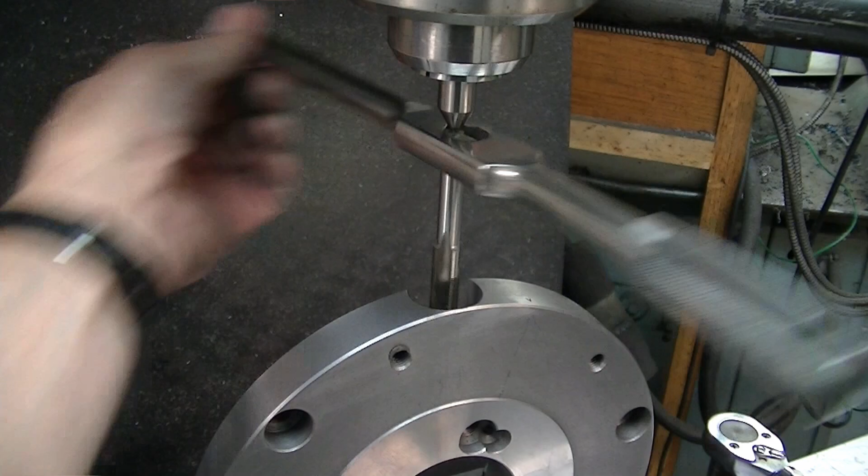We've ground our faces to the correct step height on both this piece and the chuck to match each other so they bear evenly on these two surfaces. We've added the bolt circle that pulls the center of the chuck down snug to this, basically increasing the stiffness of the face of the chuck so that the tendency to spring open and for the jaw face to puff out and let the jaws go bell mouth is reduced.

These screws are all fitted to the tapped holes. They were gauge fit, and they're still a gauge fit, very snug. Some of these diameters had to be trimmed a little bit because of the shift in axis of the tapped hole versus the bored hole. So I did that so that these all fit nicely.

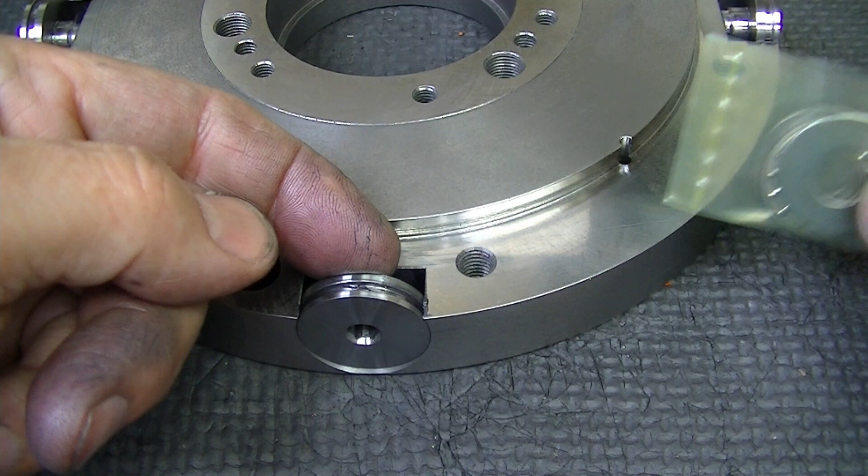These get a needle bearing, the two washers and the needle race itself that goes in between here, and the part that sticks up above here is what bears on a recess in the chuck body. So we are compressing the chuck body to push it around. That's why we put the inner plate - it was a press fit to stiffen that up.

And we're going to move on now and do the machining on the chuck body. Roughing the recess in the chuck body with a 1-inch end mill. Finishing the actual radius size and the depth with a tool that has been ground so that the bottom is perfectly flat. Putting a chamfer on this edge right there on the outside of the radius with the 1 1/4 Severance chamfer tool.

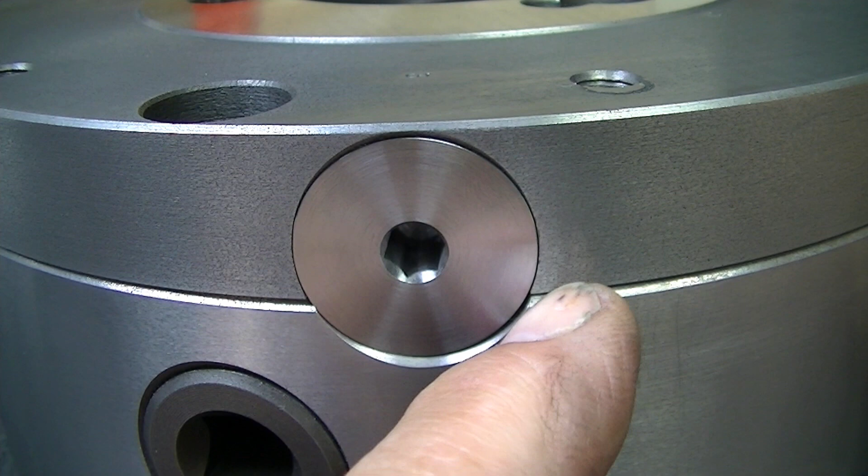Here you see the adjuster screw in location 1 of the 4, and here I'm moving this sideways and I'm checking to make sure that the radius, size, and location that I generated here has room for this to be able to translate. I had an indicator here measuring the offset as I slide the chuck body or the backing plate back and forth. You can see I've got a good clean 15 thousandths of an inch of travel, which I'm not going to use that much. I'm only going to use 10 both directions, but the clearance for the radii is good. There's the overall measurement setup.

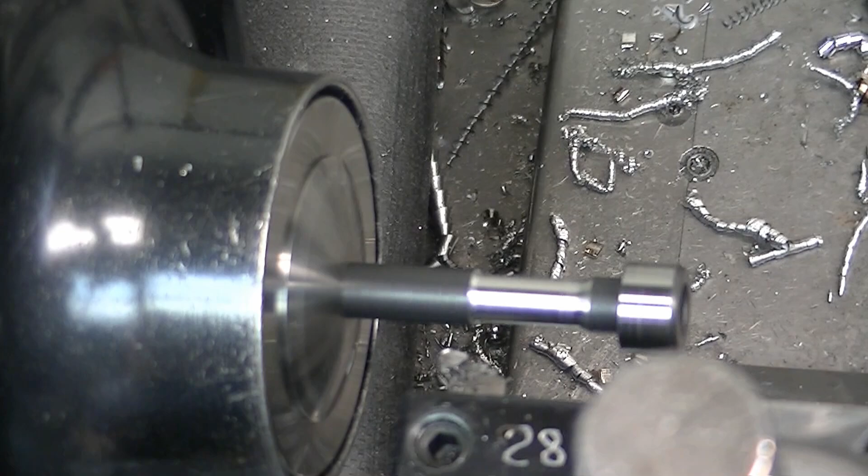Here you can see the previously turned heads of the socket heads, and now I'm using what I call the poor man's screw machine technique to incrementally turn the neck down on these so that there's more room for lateral movement in the holes without binding. This works very well. A little belt sander action to get the irregularities off the shaft. You don't want stress risers in there from deep scratches, so just polish this riding on the flexi section of the belt enough to get it smooth.

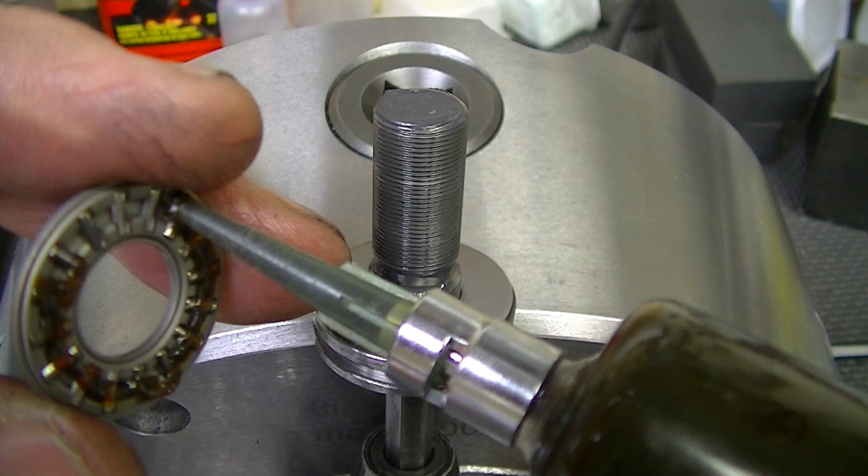I'm lubing up the needle bearing thrust washers, putting CMD extreme pressure lube on the one side. Then I'm going to fill up the bearing with this from both sides. This needle bearing will never get to the dynamic friction stage - this is always going to be static friction mode. So I'm putting the CMD on there because this is extremely good high pressure, low speed grease.

A little bit on this side of that bearing, and then I'm putting on the face that's actually going to bear on the shoulder of the chuck GN Molykote assembly grease. This is very, very high pressure stuff. And just running this in - this is just to get the bolt holes aligned. This will get its O-ring and everything when I have the final assembly.

I've got the chuck mating surfaces lubed with the Molykote GN grease. I've got these over here, and what I'm doing now is I'm going to put the chuck on here, and the bearings are on here.

I'm going to put this on, and come in and touch with the bearings both directions. That's going to square it up to where it finds its happy place angularly, because I want that settled before I put the bolts in and firm it down. Otherwise, if you tighten all the bolts and it was skewed, the bearings would be hitting off axis, not square. So I'm letting them do the alignment first.

Right here you see the O-ring all gooped up with extreme pressure lube, and you'll see when that starts to climb in the recess there, it should slowly work its way down and be happy. There we go. Yep, got to be gentle, give it time to actually climb in. Now that has an O-ring seal around it to keep that clean.

I'm no expert at generating DXF 2D drawings to send over to the laser, but this is what I found to work well in SolidWorks.

So I save that. What I do then is another sketch on the same plane, but in this sketch all I do is copy the elements of the bottom, so that it actually contains only the geometric things I want to print. Then we'll move on from there.

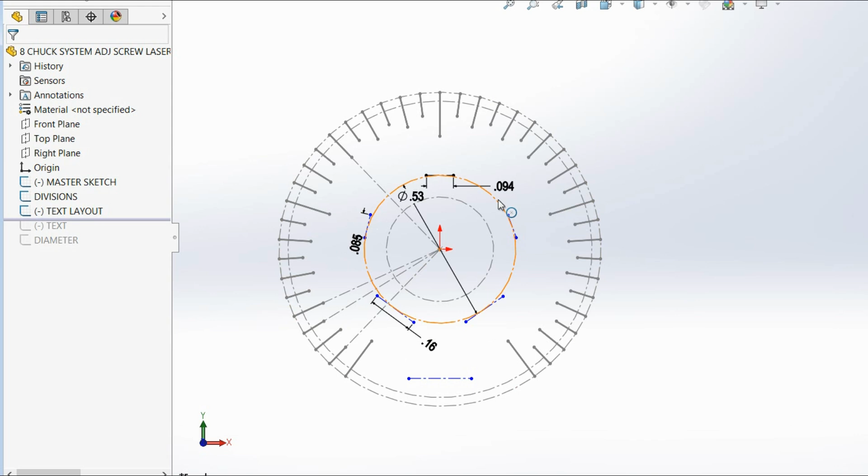And then you see these dimensions here. These are dimensions to change the length of this, which allows me to align the text laterally for each of these positions where the text is. But you'll notice I'm not putting any text in this sketch.

This is done, but then I come down, same thing. In this text sketch, I use that underlying text geometry for the text elements, and this is so I can have single line fonts. This is an actual single line font in SolidWorks, and this works really well.

And what I do is I use beam wobble. In the case of what I did on this, a 0.4 millimeter beam wobble gives me a wider line, and I actually traverse slowly, but then I use just single stroke fonts, which works extremely well. So that's what that is for. And then the last one there is just the diameter for alignment purposes that lines up in the center of the hex.

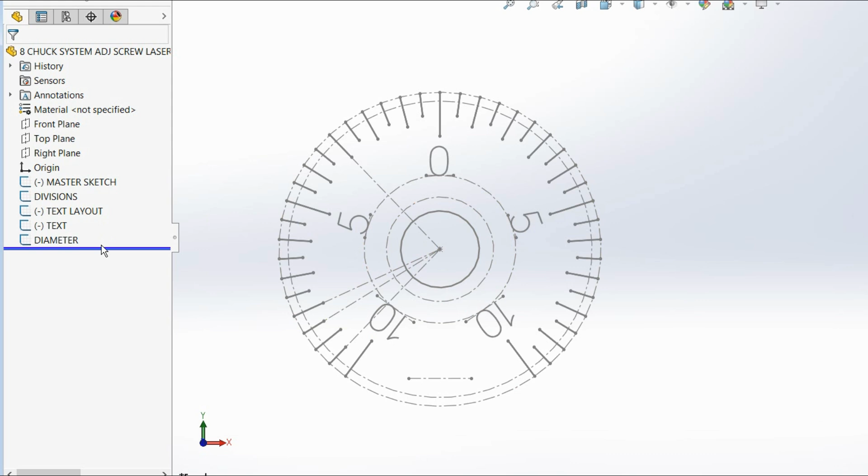Now the key here is you can come back and hide these sketches that are only layout sketches, and you end up with only the lines that you physically want. Now when you do a drawing of this, the DXF only contains this geometry. All the other stuff is hidden. So by being very careful about just using underlying sketches stacked on each other and the ability to turn them off, when you go to the drawing in SolidWorks, they are not visible and don't get converted in the DXF conversion. So that might help some.

Like I said, I don't think this is probably necessarily the best way, but it's a way that I found to work. So one of the tricky things on this was determining the amount of force I want these two adjusters working against each other. Basically, with the amount of force I generated with the 1,000 pounds here, I had a consistent drag force where I could find out how much torque it took to break this loose and make it move, basically getting the static friction going and moving.

Once I had that value, I put this on. These were not engraved yet, and trued the chuck up in the lathe with a piece of stock in the jaws, and got this to run true with each of these torqued to that correct value and centered at the same time.

Once I did that, I took a 30-degree angle gauge and just drew a pencil line on the face of these adjusters, and they're internally marked on the ends, so I knew which ones are which. Then I put my laser, lined this up with my laser engraving and the axis of the part, and all I had to do was change which number was which.

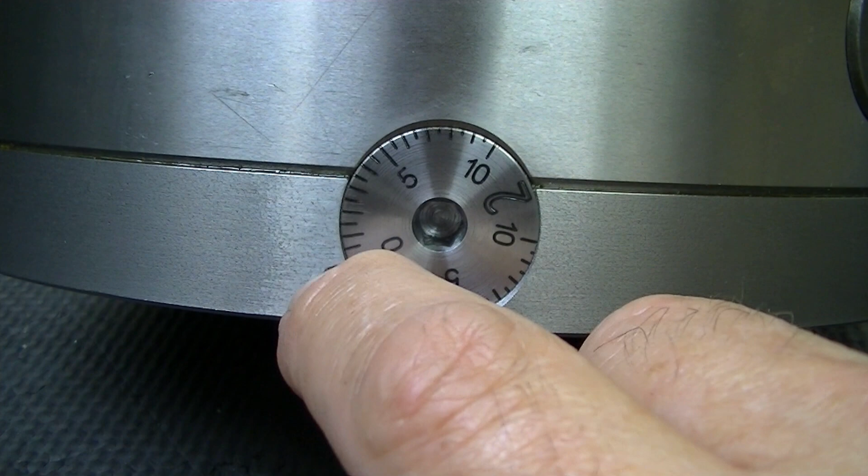And so that's how that was accomplished, to get that to line up. And then once I put them in, I lined it again, and then I actually engraved the mark in the chuck body, the backing plate, for the 0 mark. That could be moved if necessary, but really all you're trying to do is move these in conjunction, the same amount of thousandths backed up as you tighten on the other side, vice versa, always keeping the exact same amount of force in the chuck.

That combined with the ring that we added, which stiffened the chuck when it's being compressed from the sides immensely. So this chuck is not springy like a Buck chuck is, where there's a lot of mush in it, where you can tighten it more and more, which is bad practice, but it stretches all around. This is much more solid. So this isn't the be-all end-all.

If I was going to make one of these chucks from scratch, I would actually make this outer chuck body be all the way out like this, continuous, so that the needle bearing would bear full face, and the chuck backing plate would actually be captive with a bolt-on lip where everything's ground very precisely, where it's just a gauge fit, with no bolt holes actually holding the chuck there - no nothing but a gauge fit of an overhanging tongue like this, where it can move. The chuck can move on a flange.

And that's how Dan Gelbart's adjustable chuck is done. His is kind of a more advanced version of this, where the control of these two screws, or the two moving systems, is coupled together. So if I could get this to magically engage with that screw over there clean through, it would accomplish the same thing - this would move, and the other side would move, and the amount of compression of the adjusters would remain the same all the way through the travel.

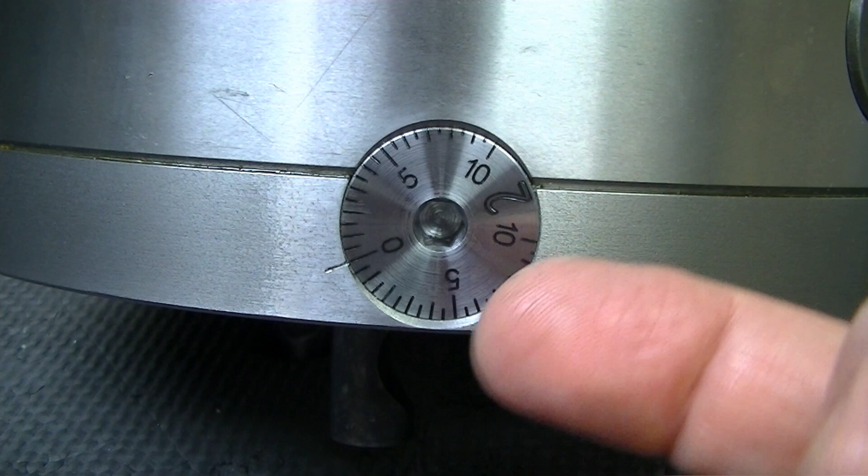In this case, I'm just doing it manually. If you tighten this one thousandth, you have to loosen the other one a thousandth, and you just keep track of it. Since you only have ten thousandths of travel either way, it's very easy to do.